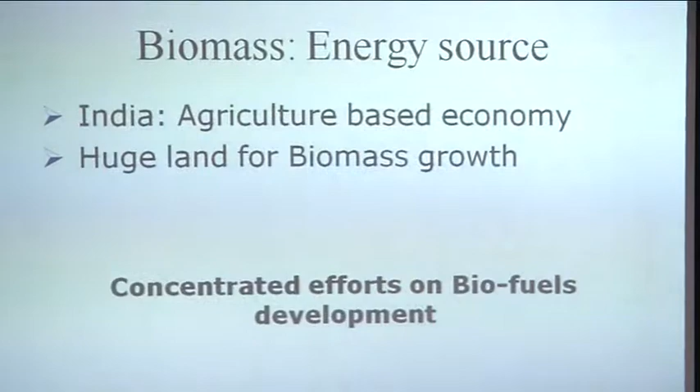What was the motivation of doing something like this? The motivation is: India, being a largely agriculture-based economy, has a huge quantum of biomass. I'll give you some statistics to start, just to justify, as all engineers do, choosing a particular topic for research, since people are likely to ask why you have chosen that topic. Either the topic interests you, or finding solutions based on it is likely to have such huge impact that it makes you famous.

Whenever you try to do something, you try to get recognition, either in terms of money you earn or publicity. Both are extremely satisfying results, and we carry out this research not only to satisfy our inner curiosity, but also to see whether we make a reasonable amount of money while coming out with a product useful to society.

As an agricultural economy, is it possible for us to look at this agricultural produce, which is essentially biomass—leaving aside food grain for now—and whether this biomass can be put to use? A lot of work has been going on, including in the mechanical engineering department, where biomass conversion to bioethanol is being practiced. The simple reason is it's easier to burn liquid or gaseous fuel compared to solid fuels. But still, 70 or 80% of India's population rely on burning solid fuels, so it is necessary for us to have a look at it.

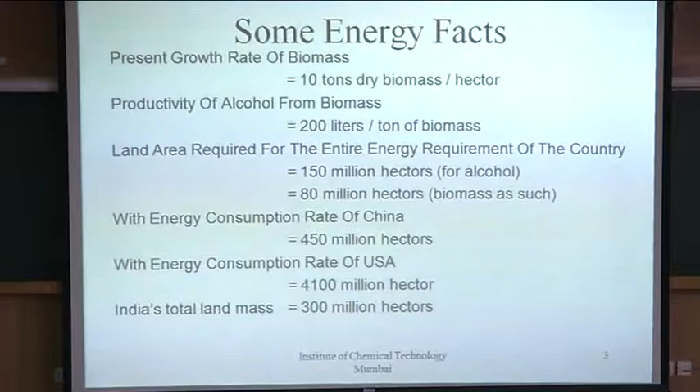If I just do some basic back of the envelope calculations, on an average, 10 tons of biomass is produced per hectare. You don't have to do anything. The typical annual rain cycle and the seeds which are there will produce that much quantity anyway. If you want to cultivate it, you can bring this particular number right up to approximately 30 tons.

Now 1 ton of biomass, in principle, all the carbon and hydrogen associated with it is converted by delignification, saccharification, converting cellulose to glucose and finally to ethanol, capable of producing about 200 liters of alcohol per ton. You can stretch it up to about 300 liters, but let us consider an average of 200 liters of alcohol per ton of biomass.

If I say that I want to satisfy the entire energy requirement of the country, you would require about 150 million hectares of land area. If I want to burn the biomass as such, because while converting biomass to ethanol we lose out on certain calorific value, you would require about 80 million hectares of land.

If you want to meet the current energy consumption of China, you would require about 450 million hectares. If you want to match the current energy consumption of the US, you would require about 4,100 million hectares, whereas India has only about 300 million hectares. So obviously we cannot be aspiring to meet this particular requirement of energy consumption and get to the level of US or China, because we just don't have the capacity in terms of land mass.

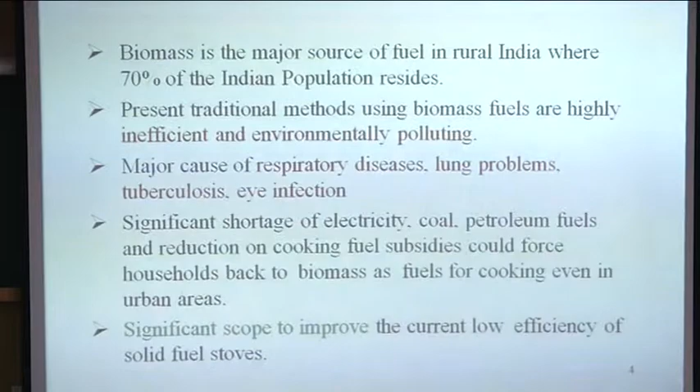Now when you want to burn the biomass as such, which 70% of India's population, the rural population, still rely on, what you realize is that these biomass stoves or biomass burning processes are run extremely inefficiently, and they are environmentally polluting.

Not necessarily in terms of carbon dioxide emissions, because this carbon dioxide is neutral carbon dioxide. The same carbon dioxide will be taken up by the plant, and the plants will grow again, and they will keep on recycling it. But in terms of emission of particulate matter, which is responsible for respiratory diseases, lung problems, eye infections, tuberculosis, and so on and so forth.

As engineers, if you keep looking at these particular processes, you realize there exists a huge scope, because the systems are run inefficiently. If the system was running efficiently, then obviously it has reached its thermodynamic equilibrium state or maximum efficiency state. But because they are run inefficiently, any process should be looked upon as an opportunity. That is the basic motivation for this work.

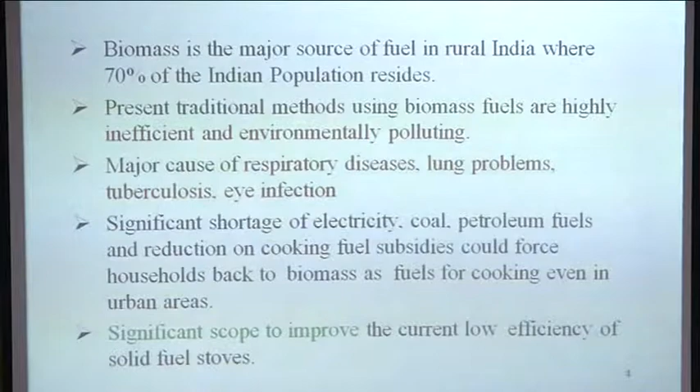In terms of liquid fuel consumption, Indians use about 2 barrels of oil equivalent per person per year. With an approximate population of 1 billion people, we use approximately 2 billion barrels per year, which is approximately 300 million tons per year, about 120 million tons, and India currently processes about 150 million tons of crude in terms of refining capacity.

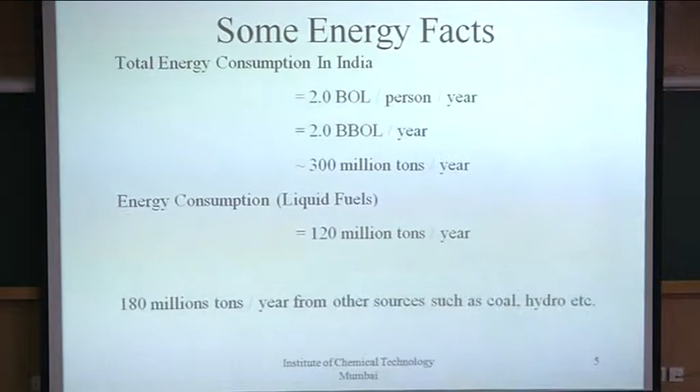180 million tons come from other sources such as coal, hydro, etc. But where does this energy go? In terms of per capita consumption, it's equivalent to 500 kgs per year, global is 1800, and US is about 8000 kgs per year. So energy consumption of India is bound to increase, as well as China, and we must be gearing for it.

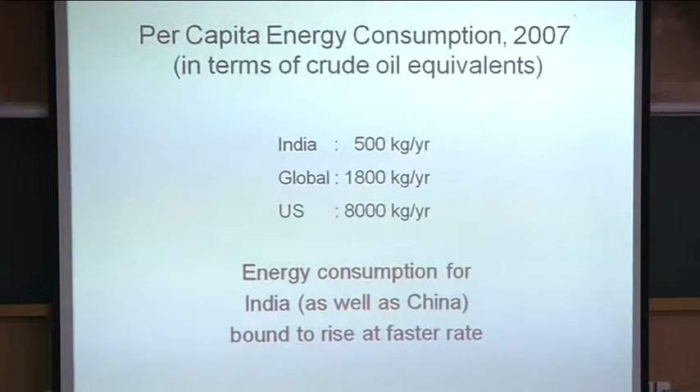And where does this energy get utilized for residents? Lighting is a fraction of it. India has a huge population. We have to prepare food for these 1 billion people, 2 square meals a day are required. And you know how elaborate these Indian cooking practices are. They are all essentially multi-step synthesis processes, and you all know that as the number of steps in the process increases, that affects conversion.

Even if you consider that, let's say, I am preparing one particular item which requires 7 steps, and I am converting each step with 90% efficiency, 0.9 raised to the power 7, ultimately the efficiencies are going to be substantially lower. So if there exists an opportunity, can we have this 7-step process converted into a 1-step process? Of course there are, and that is where you see these ready-made food packets. People are exploiting this. You have everything out there, put it in the oven or a microwave, and you have a ready meal available. The energy consumption is going to be substantially lower for you. But while preparing that, have they looked at the fundamental and basic principles which are involved in cooking?

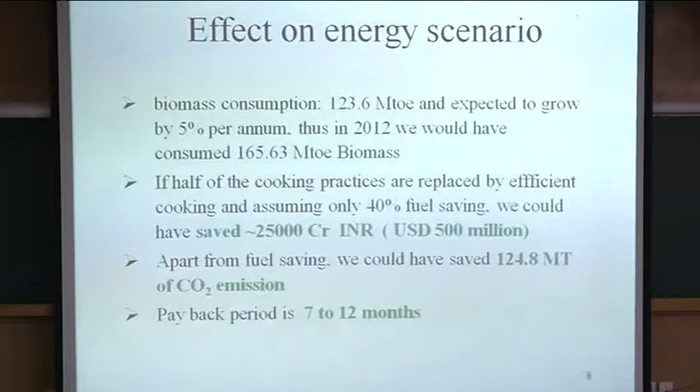If one can look at it, you can imagine the kind of impact it is likely to have. And that is why I have said that the payback period for any of these activities is usually less than a year, and of course we are contributing to the reduction in CO2 emissions. So cooking fuels in India, as we use it, 70% of the rural areas essentially rely, 85% of those rely on biomass, 15% are only commercial fuels, such as kerosene, LPG, coal, or whatever. 56% of the urban population uses LPG. LPG consumption has also increased. With the government removing subsidies, it's likely to have a huge impact.

So the outline of today's talk is going to be: a basic introduction, which I have already given. I'll run through a couple of slides very quickly just to recap what we have talked about. What is the motivation and objective? We need to look at the fundamentals of it and see how solid biomass essentially combusts, essentially burns, what sort of emissions are coming out of this, how we can model the system and have some sort of quick calculating method based on a graphical user interface approach, the integrated equations which we'll see in due course of time, and then we need to validate this with the help of experimental analysis, and we'll try to draw some conclusions.

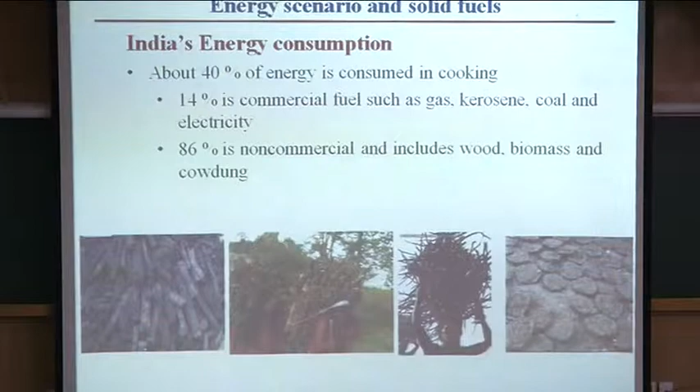Now this is the total energy consumption which we saw. About 40% is consumed in cooking, 14% is commercial fuels such as gas, kerosene, coal and electricity, 86% is non-commercial and includes wood, biomass, cow dung, and so on and so forth, as you see in this particular picture. Now this is how they are conventionally burned.

You have a 3-stone fire, which was the original device, and even when you go camping, this is exactly what you do: get 3 stones, start burning the biomass, put your vessel on top and try to cook a meal. Then people thought about improving thermal efficiency, so they came out with mud pots, like Abhinav, Alok, Pavan, which has got a chimney associated with it, creating suction required to supply combustion air.

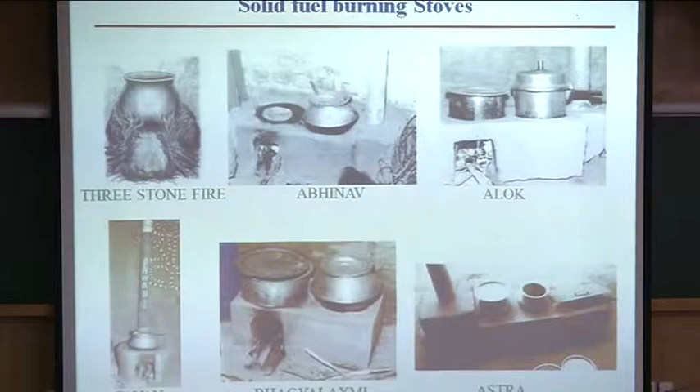Bhagyalaxmi, Astra, all of these - there are approximately 43 different cooking stoves reported by MNRE, the Ministry of New and Renewable Energy, and none of them have been scientifically analyzed from first principles. You can imagine the state of science related to one of the most important devices used in cooking practices. Improvements include metal stoves, Janta, Navajyoti, rocket stove, Harsha stove, Purja - all of these definitely improve upon efficiency, but what are the actual levels of efficiency I'm talking about?

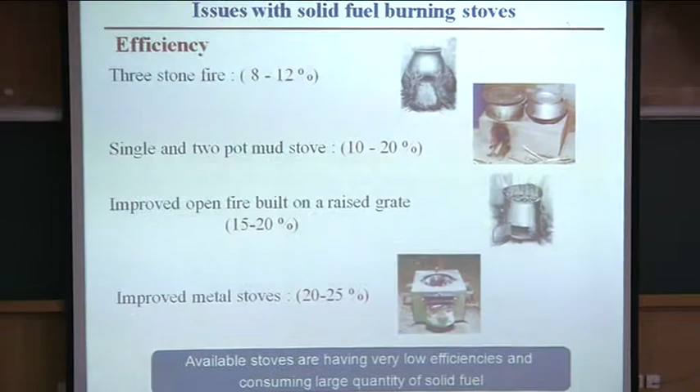3-stone fire: about 8 to 12% thermal efficiency. Single and 2-pot mud stove: 10 to 20%. Improved open fire built on a raised grate: 15 to 20%. Improved metal stoves: about 20 to 25%. The bullets in blue out there essentially tell you the basic conclusions of each of the slides we are talking about.

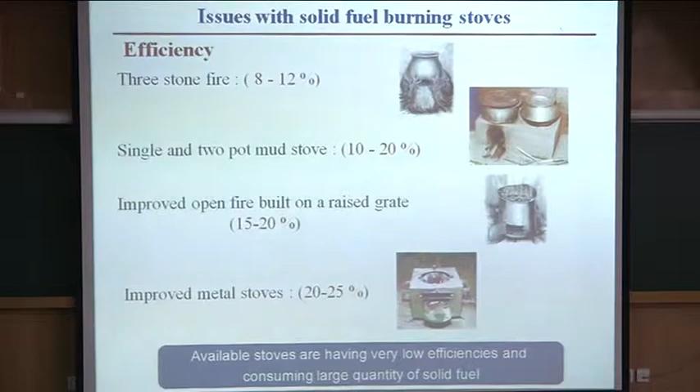This clearly indicates that the available stoves have very low thermal efficiency and consume a large quantity of solid fuel. So we need to address this particular issue. In addition to the loss of fuel in terms of calorific value, there are huge health effects associated with it, such as respiratory diseases, lung problems, tuberculosis, and eye infection.

Whenever a system is efficient, obviously the emissions will be less. So whenever we try to design an efficient system, we are naturally addressing the issue of emissions. The more efficient the system, the less it emits to the environment. So in terms of exergetic loss, or thermodynamic efficiency, we are going to be nearer to the limit.

Whenever biomass is burned, it passes through 4 stages, and we'll see how these stages occur. First it gets dried. Then the volatiles from the biomass get devolatilized, and these volatiles burn as homogeneous combustion. When all the volatiles are emitted and burned, what's left is the carbon, which is char, and this char burns in the form of heterogeneous combustion. So these are the 4 stages occurring, and depending on the design, they operate either in parallel or sequentially.

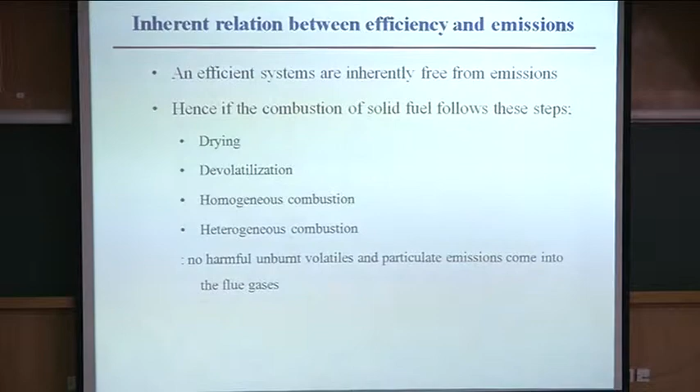And since we need to know what sort of energy is required for cooking practices, which will come a bit later, we need to be able to channel these sequential processes so that we extract the maximum out of it.

So the motivation is that the rural population does not have access to LPG - they still rely on biomass. The availability of large biomass makes wood stoves a ready-made option for rural India. But the increase of these stoves is similar to 18th and 19th century England, where they used coal as fuel to warm homes, and it produced so much smoke that they had to ban it for heating.

As a result they discovered gas or oil, and that burning became much more efficient, which clearly indicated that from that point onward, solid fuel burning has always been a problem and has caused an increase in emissions to the surroundings. So the objective is to design a solid fuel burning stove meeting the requirements of low emissions and high efficiency. This objective is achieved.

Now I am looking at the science part of it. We need to identify where all these 4 or 5 reactions, or transformations, we talked about are occurring, and whether it's possible for us to design it such that whatever particulate emissions come out, these particulate emissions are trapped, and then they go on to burn.

Obviously only the inorganics will come out, which can have micronutritional value, and can be used as a fertilizer, or as a supplement for micronutrient requirements in agriculture.

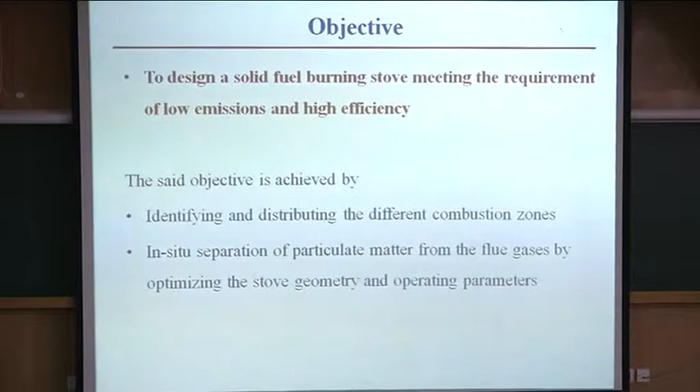So we need to understand the basic combustion kinetics of solid fuel. We need to know the typical composition, and we need to understand the basic theory of combustion.

We look at a single particle and packed bed of wood, because we don't just use one particle. We need an ensemble of particles to supply the required quantity of heat to cook a particular meal. And then we need to look at the ignition methods, whether we need to light it from the bottom or from the top.

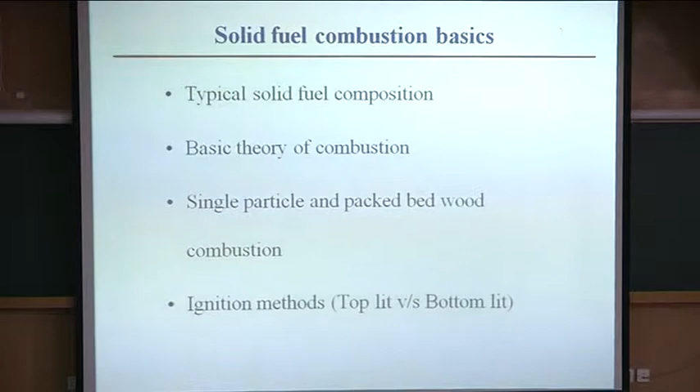All these need to be looked at, because each of these will contribute to either an increase or a decrease in efficiency. So we start with the proximate and ultimate analysis of wood, which also tells me the calorific value associated with this wood.

Now wood is available in different geometric forms, and the particular device I use will need to be able to accommodate different shapes of wood particles.

So these are the basic reactions occurring: evaporation, where water associated with the biomass gets converted into vapor. Then pyrolysis of the wood, which results in char, some volatiles, and additional tar, which are essentially hydrocarbons. Being an endothermic process, it also produces a certain quantity of carbon monoxide and carbon dioxide, which need to be burned.

Of course you can't get it out otherwise. Then you have homogeneous combustion of all the volatiles coming out, and finally the heterogeneous combustion of the char, the carbon associated with it.

So in a packed bed form, you will find that the char exists at the top, there is a flame front or ignition front somewhere in between, and unreacted fuel exists at the bottom.

So essentially when you light it from the top, the system gets dry, volatiles come out, you burn those volatiles, and the ignition front propagates downwards until it reaches the bottom, where all the volatiles are removed. Then the ignition front starts moving upwards in the form of heterogeneous combustion.

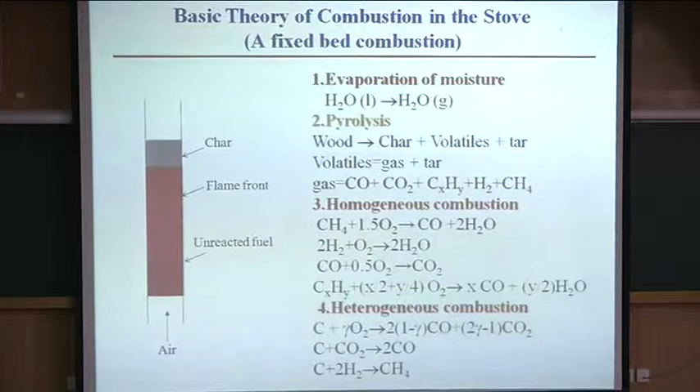And that is one of the figures. I don't think this particular thing is likely to work. If not, then I need to go back.

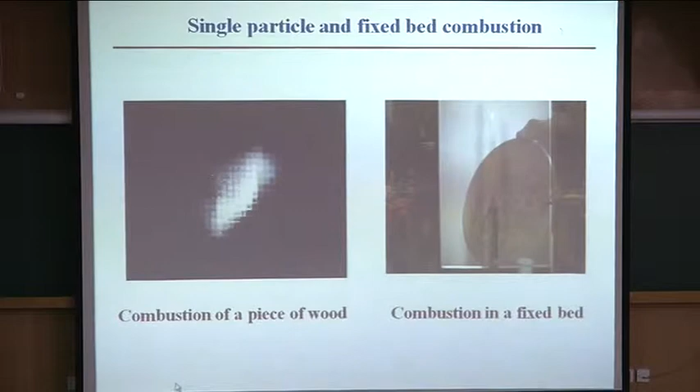Interestingly, we have been burning wood for so long, and this particular figure comes from Europe. Nobody in our country has done this.

So this is the combustion of a single wood particle. Now you can see how the wood particle is combusted. But if I supplement it with air, what happens to this as well?

You see it has started glowing again, and ultimately that carbon which remains unburned also gets completely burnt, and you're left with a very small fraction of residue, which is the inorganic material that's there. Let me show you one by one and then we can go back to it.

Okay, this is the packed bed, and what you see here answers your question. You see there is a char, a reaction front, and unreacted fuel.

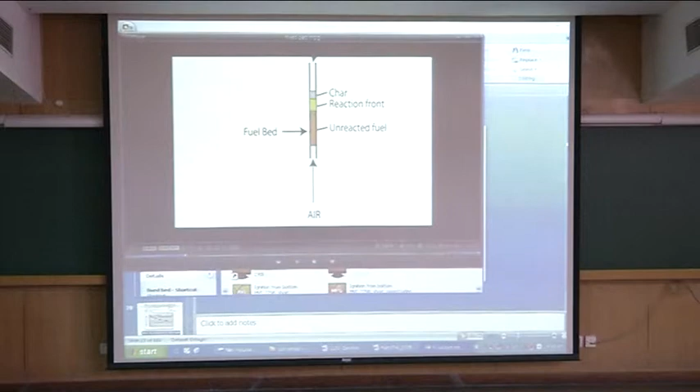So when you put it in the form of a bed, as it exists, and you light it from the top, you see how the ignition front is moving now, with char being generated at the top. When the ignition front reaches the bottom, all the volatiles have come out, and then the ignition front starts moving from bottom to top again.

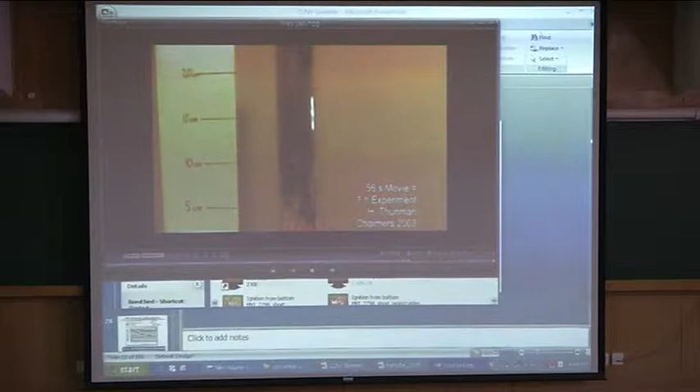This only happens when you light it at the top. However, if you light it at the bottom, the air coming out from the bottom as primary combustion air...

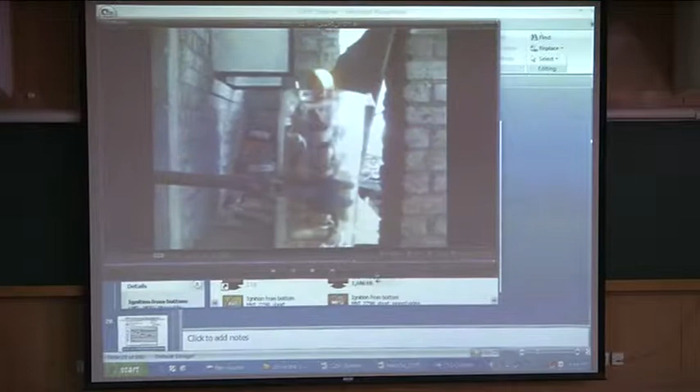That primary combustion air does not see a flame. The flame is somewhere downstairs. That heat generated by the flame is given to the wood particle on top. The wood particle on top devolatilizes, but those volatiles do not see the flame, so the volatiles don't burn, and it produces a lot of smoke.

Whereas if I burn it from the top instead, as shown in the movie I had shown earlier, you don't see any smoke, and the ignition front moves from top to bottom and then again from bottom to top.

These were the videos which I wanted to show you, which essentially tell me how this entire operation of combustion can be looked upon, and how this combustion operation can be modeled, provided the computer agrees with it.

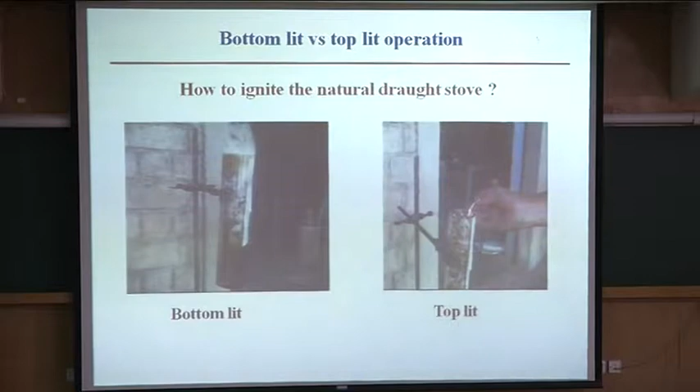Bottom lit, you see a lot of smoke on the side because the bottom part is having a flame which is supplying the heat. But how does a flame or an ignition which is somewhere propagate downward? The air is coming from bottom to top, and the only way the portion of the fuel below the ignition front can increase to ignition temperature is through radiation. So we have to consider the heat which is getting transferred by radiation and address the issue accordingly. This has all been considered in the case of the model.

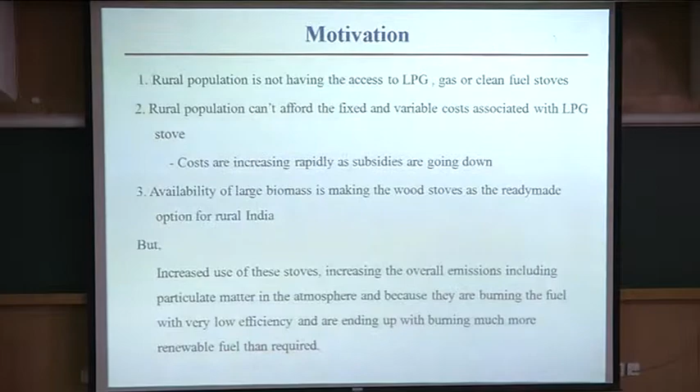Anyway, I have given you a picture. This is what it is.

So we start modeling this particular system. What do we model? We model the steady state calculations. We estimate the effective flame temperature and excess air. We write expressions and develop a model to understand how the suction of air required for combustion is actually entering the system, and the propagation of the ignition front. After the ignition front has moved to the bottom and only char is there, we need to model the heterogeneous combustion, and then all of this can be put in the form of a graphical user interface.

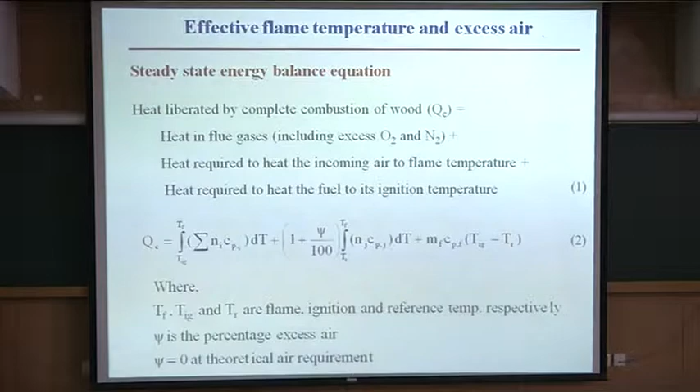So you start with a steady state energy balance, which is simply: heat liberated by complete combustion of wood is equal to heat associated with the flue gases, heat required to heat the incoming air to the flame temperature, heat required to heat the fuel to the ignition temperature, so on and so forth. So all these energy balances need to be done.

If I look at the quantum of air which is used out here, you see as the quantum of air increases, obviously the energy which is utilized to heat up that air will be used up and the flame temperature will go down. Now what sort of flame temperatures are required for cooking purposes?

If you are going to do baking, then you bake it at about 250 degrees centigrade. If you fry it, about 220 degrees centigrade. If you want to steam it, you will steam it at about 100 degrees centigrade. So the flame temperatures which you are getting are actually several times higher than what you require to cook. And as you all understand, using energy in terms of its quality for the specific application in mind is likely to be the most effective and efficient way of using energy.

How many of you know what is the exergetic efficiency of the electric geyser which you use? In terms of the first law of thermodynamics, you say this is the electrical energy which I have supplied, and the water has been increased in its temperature, mCp delta T, and you find the electrical consumption is matching that, so I am having 90% or 95% efficiency in terms of transfer of enthalpy equivalent from electricity to heating up water. But if you consider the exergetic efficiency of an electric geyser, this exergetic efficiency is of the order of 3%.

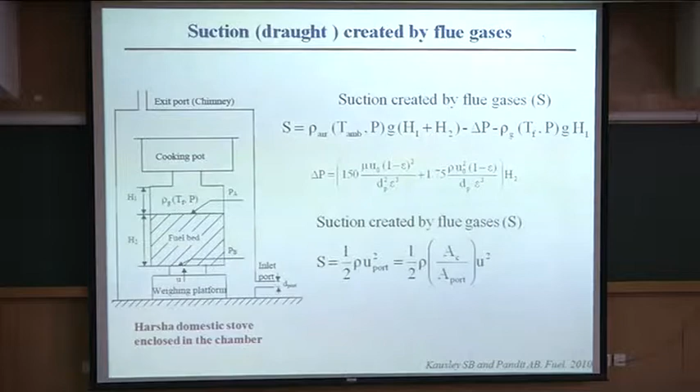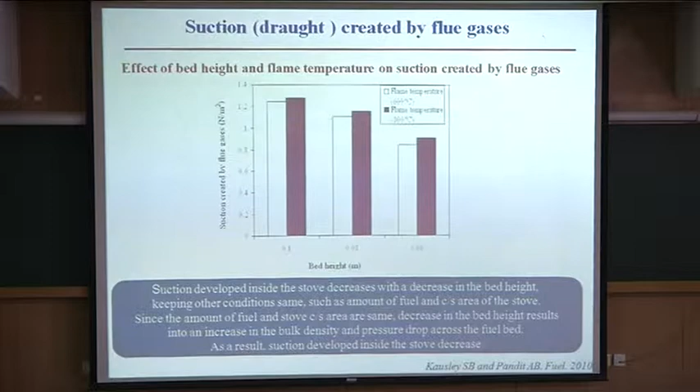If you understand the height of the bed versus the kind of suction required, because the suction should create sufficient air to carry out combustion completely, you find the taller the bed, the larger the suction created. But is it practical? If the bed is about 10 feet tall, it will create great suction, but it will be like preparing Birbal ki khichdi - I'd have a flame front 12 feet away from the vessel where I'm trying to cook the material, so losses will be substantially higher. So I need a proper balance between the two, achieved by understanding the basic heat transfer when fuel is combusted and releasing its heat.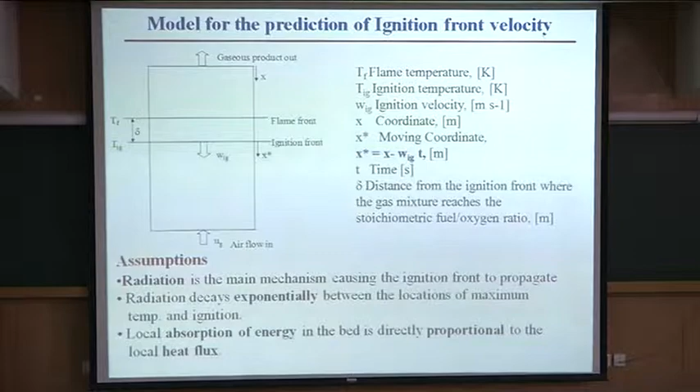So local absorption of energy in the bed is directly proportional to the heat flux. Heat flux is the calorific value multiplied by the cross-sectional area and the ignition front rate, and this allows you to estimate the energy delivery rate. So ignition front velocity can be estimated by writing a similar balance, which can be used to determine the burn rate and power delivery.

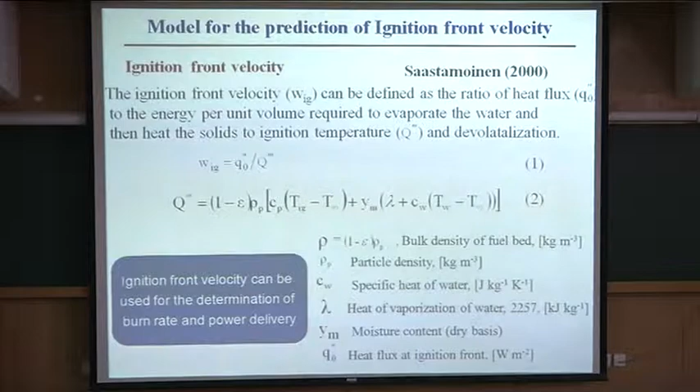If I know the ignition front velocity, which depends on factors such as shape of the wood or biomass particles and the moisture content, all this can be modeled quite easily and will allow you to calculate the flame propagation velocity. Flame propagation velocity multiplied by cross-sectional area gives the heat flux, and depending on how fast I want to cook the material, I must have a bed cross-section capable of burning at a specific rate - so many kgs or grams per minute - delivering the required power.

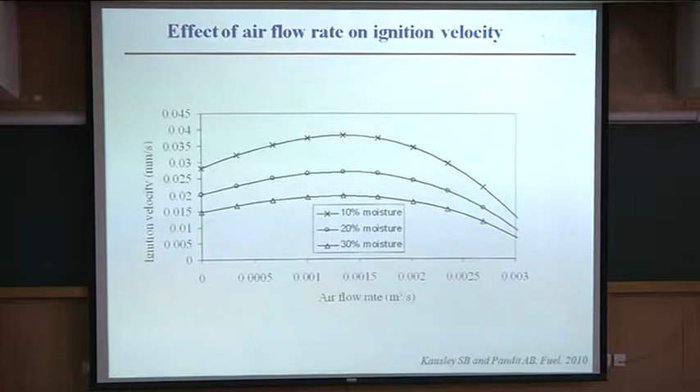So when I start with fuel of known moisture content, I will be able to estimate the rate at which the flame will propagate in the downward direction. All of this is present in the form of a simple stove.

Now what is a stove? You have a chamber in which the fuel is packed. You have secondary air supplied from the annulus, not the bottom - primary air is supplied from the bottom. This heats up the secondary air, and when secondary air comes out, it provides hot air for the volatiles to combust at the top, increasing the thermal efficiency of the system.

Secondary air is required to burn the volatiles at the top, whereas primary air is required to sustain the combustion ignition front as well as liberate energy for the ignition front to propagate. So with primary air, you model the system as a packed bed system, and write down all the balances.

We make certain assumptions in our model. The system is one-dimensional, gas is described as an ideal gas, fuel particles are of the same size. You can accommodate any fuel particle shape, spherical, cubes, stakes, or whatever - the model can take care of that. Bed voidage is assumed constant and remains so.

This may not be true, as you saw from the first movie, where initially when air was not there, it was capable of maintaining the original shape of the wood particle. But the moment air was there, the wood particle disintegrated. This results in a decrease in voidage, which increases the pressure drop, and progressively the rate at which air is available goes down.

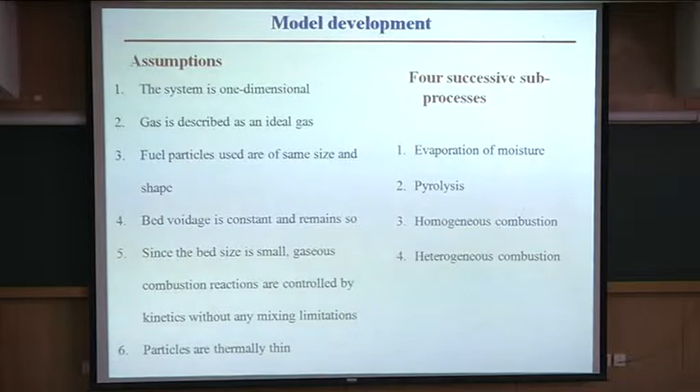So the four successive sub-processes are modeled: evaporation of moisture, pyrolysis, homogeneous combustion, and heterogeneous combustion.

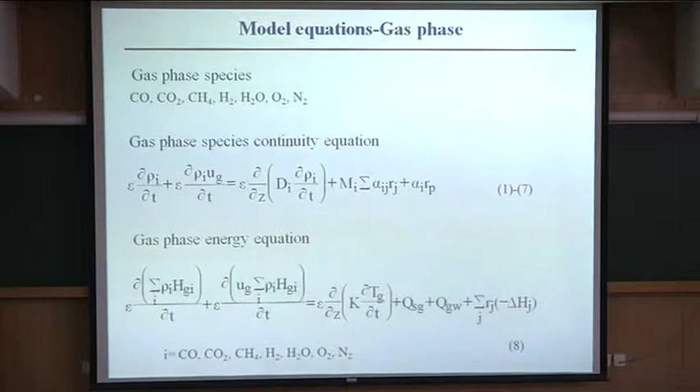We start with the gas phase analysis - gas phase continuity equation, gas phase energy equation, and similarly for each of the gases present. Similarly we do for solid unburned wood, moisture, and char, writing similar equations in terms of continuity equation and also energy equations for the solid material.

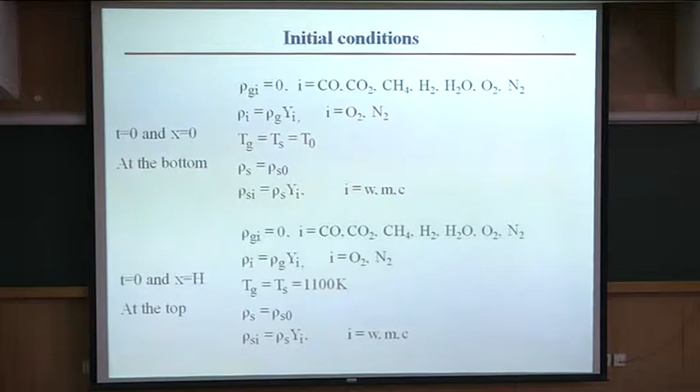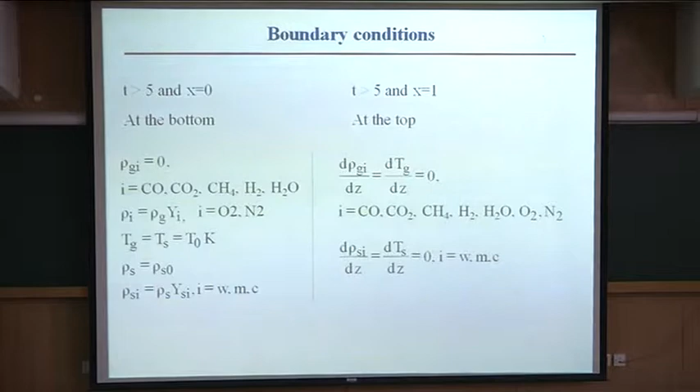We know the initial conditions because we are lighting it from the top, and the propagation of the ignition front is going to be from top to bottom and then reversing it. So I have initial conditions, and then I start the boundary conditions in terms of the densities, the starting temperatures, and the location from where I need to simulate my packed bed combustion.

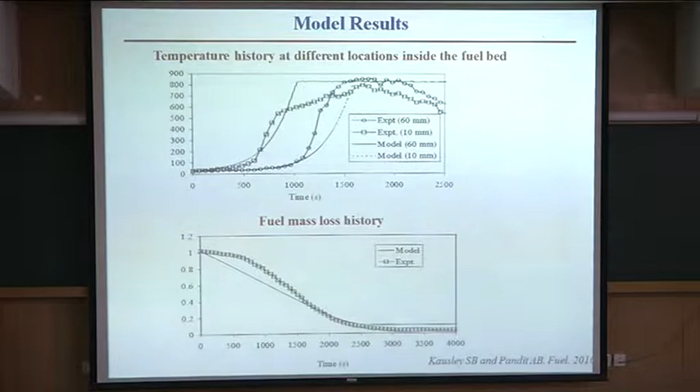Whether that energy is being utilized by the material which is getting cooked is the second issue which we will address in due course.

All of this can be put in the form of a graphical user interface, and I can essentially design my solid biomass stove based on parameters such as particle density, particle diameter, bed height, fuel amount, distance from the stove and the pot, and the length, breadth and width of the chamber, which gives the adiabatic flame temperature, the suction which is created, and the rate at which the ignition front is going to propagate. It gives you the calculation in terms of a graphical user interface based calculation that tells you the basic parameters.

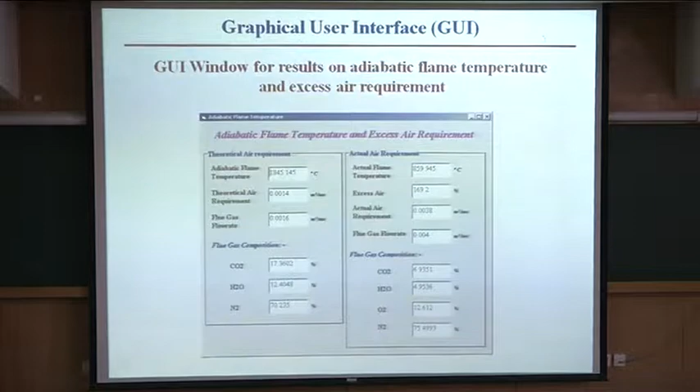So once I have this graphical user interface, very similar to ready-made software, you keep plugging in values and find out what sort of combustion rates we are likely to get from different designs, and then you need to fabricate those particulars and test it, and we'll see what happens in a minute.

So you see here the flame propagation velocities, or ignition velocities, are of the order of about 1 to 4 millimeters per second.

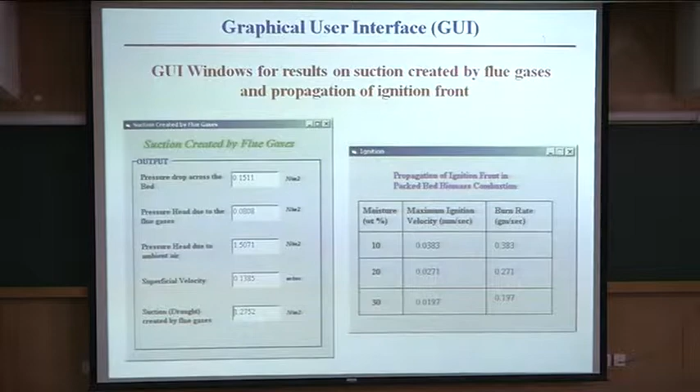That is the rate at which the flame is propagating. So if I know the height of it, I know how long my fuel is going to last, and whether that time is sufficient for me to cook the material or not, I can calculate it independently with the knowledge of the energy which is required for cooking practices.

Now we will run very quickly through the experimental analysis, where we have varied the parameters such as particle size, air flow rate, bed voidage, bed height, stove geometry, multi-pack bed, and I'll explain it to you in a minute.

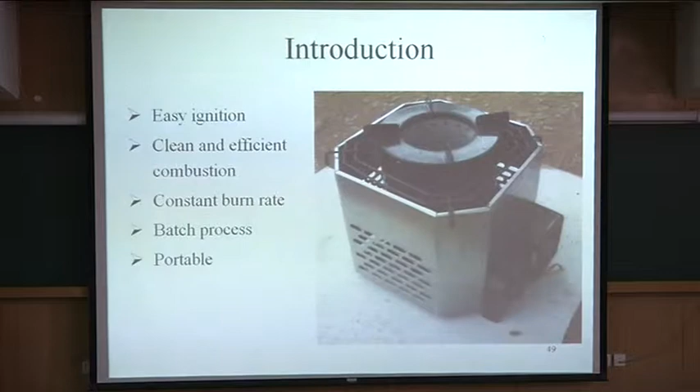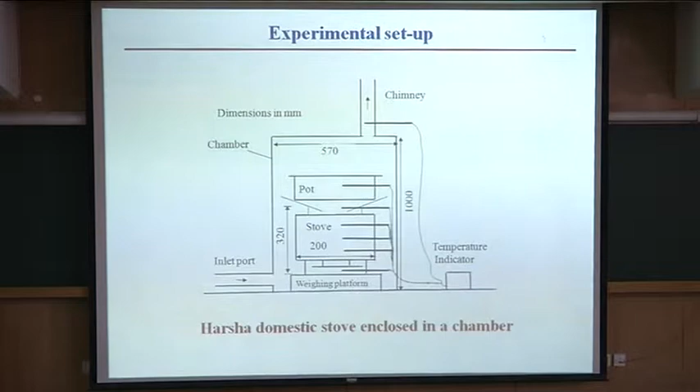So what was done: this entire assembly which contains the stove and the pot was mounted on a weighing platform, and this entire weighing platform was covered with a drum. So the only air is available through this port, and the exit was at the chimney, and this allowed me to measure the loss of weight of the fuel as a function of time based on the indicators of the weighing platform. I could also measure velocity here, velocity at the exit, using a hot wire anemometer, and I can collect the sample and analyze its gas content to validate my experimental model.

This is typically wood particles, the type of experimental device which we use. Ignition at the top of the fuel bed - this is how it starts burning. This entire thing is put in the form of a drum, and this is mounted on a weighing balance as indicated earlier. And I get information related to how the change in fuel size, fuel particle size, and what sort of temperatures with the help of thermocouples I am able to get.

So I am using mango wood particles with a moisture content of 12%, and the dimensions are a cube 15 millimeters by 15 millimeters. The only reason I have used that is since we have a model which takes into account the specific shape, I just wanted to validate the model. But the model can take care of any shape if you want.

What it clearly indicates is that initially it's very slow, then it peaks up, then it starts going down. Usually this is not the observation you'd expect when you start cooking food using gas - the moment you start the gas, it rises up, remains for a specified period, and then goes down. And the temperature of the gas flame, as we use in the LPG flame, is of the order of 1200 degrees centigrade. Whereas if you remember earlier, the maximum temperatures we were able to get was about 850 to 900 degrees centigrade.

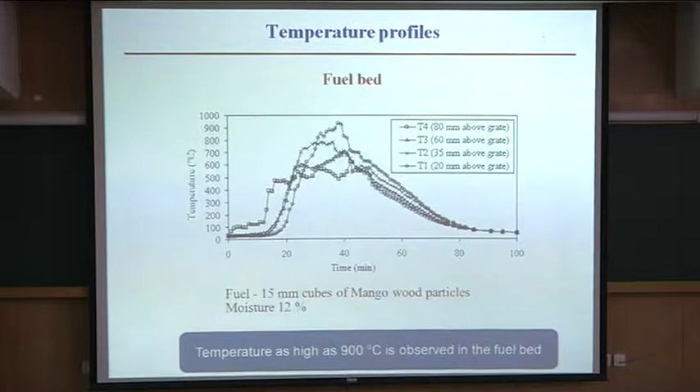Any boiler designer will design a boiler with a specific heat flux. The optimum heat flux at which the boiler will give you maximum thermal efficiency, in the range of about 88 to 90%, is when the heat flux is of the order of 20 to 24,000 kilocalories per hour per meter square.

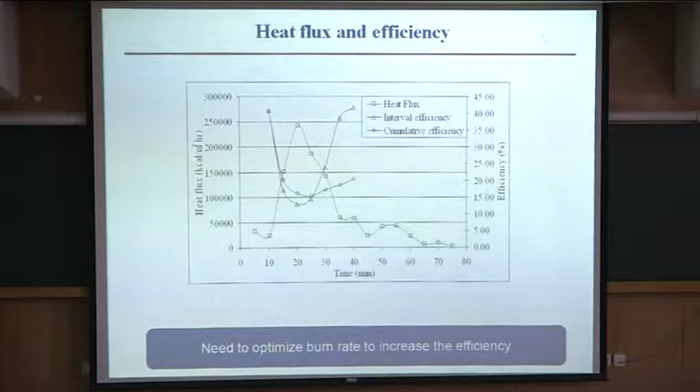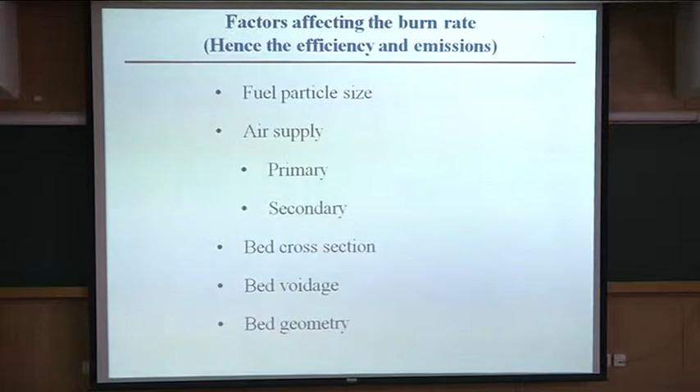If you exceed that, the boiler is incapable of accepting that much quantity of heat. More heat goes out through the flue gases, resulting in loss of thermal efficiency. So the parameters tested include fuel particle size, air supply (primary and secondary), bed cross section, bed voidage, and bed geometry.

Particles with high surface area burn too fast, which reduces efficiency. Too large particles mean combustion cannot be sustained because they have very high thermal inertia. For the particle to catch fire and reach ignition temperature takes a lot of heat—it cannot sustain itself, requiring frequent relighting.

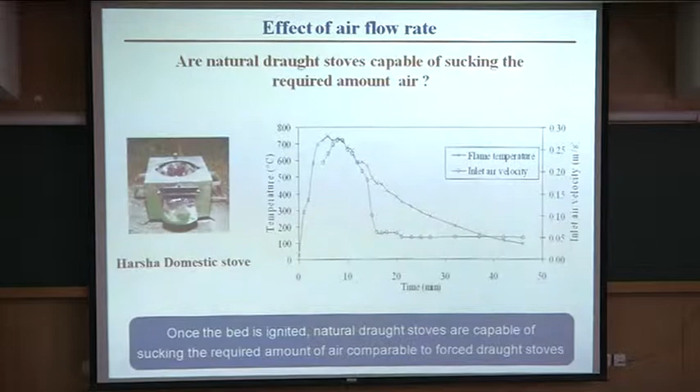Different shapes and different ways of introducing primary and secondary air have been tested. Once the bed is ignited, natural draft stoves are capable of sucking in required amounts of air comparable to forced draft. So initially, we need forced draft only until the bed catches fire the way I'm expecting it to.

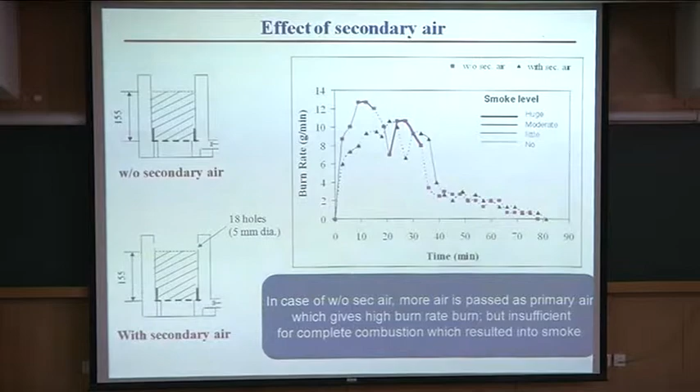With the right flame temperatures, I can accommodate the entire quantity of wood in different forms—I'll explain that in a minute. Just keep looking at the efficiencies we're talking about; we're still hovering around 16 to 22-23%.

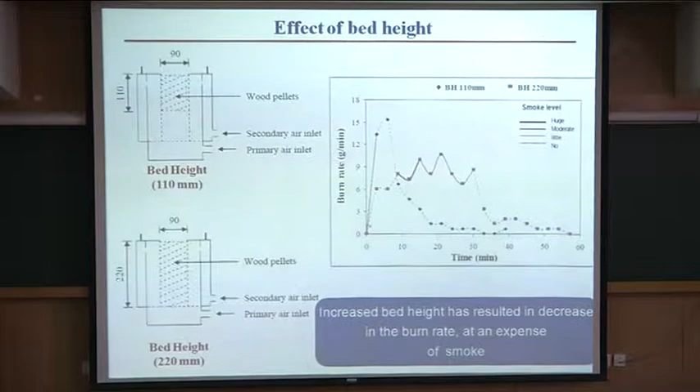So the only way to improve this efficiency is to control the energy delivery rate and manage heat flux to be in the range of 20 to 24,000 kilocalories per hour per meter square. This also shows how the smoke level changes, all linked to particle characteristics like surface area to volume ratio.

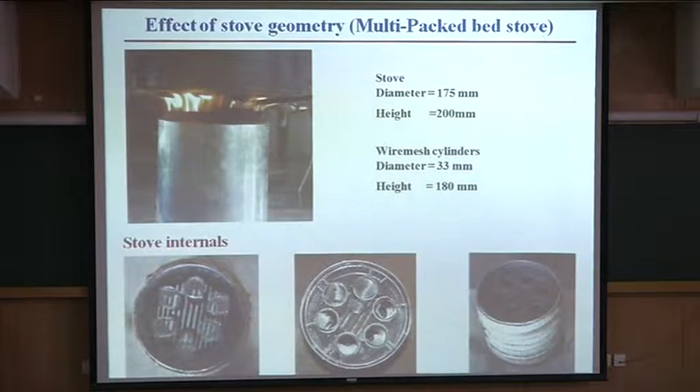So we came up with different designs. Wood could be added to these 6 chambers, which can provide the quantity of air required for cooking by filling wood in between. The next figure shows how different experiments were done—wood packed here, wood packed in between, wood at the top to light it, then observing how the rates change.

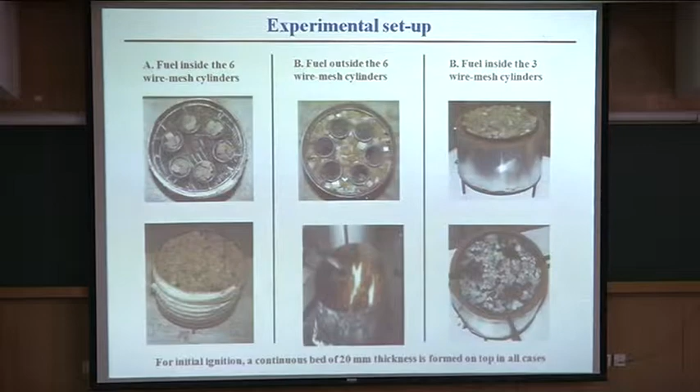This is very similar to a wick stove. The wick stove is known to have much higher thermal efficiency compared to a Primus stove. You see how effectively it is combusted, validating the assumption of no significant change in bed voidage as it burns—it remains more or less the same.

Now you see here we're able to get in excess of 30% efficiency for item C, where I pack the fuel inside 3 wire cylinders. If I use 2 smaller wire cylinders, the flame cannot sustain itself because it doesn't generate sufficient energy for the flame front to propagate.

So I need a critical thickness, which works out to be approximately 6 centimeters, 60 millimeters. You see this: initially high, then maintained for some period, giving maximum thermal efficiency. So I need control over it—a burn rate over cross-sectional area.

Initially when material is at room temperature and you want to heat it to 100 degrees centigrade, its heat pickup capability is initially very high, so you need to supply energy at a higher rate it can accept. However, as temperature approaches 90 degrees centigrade, delta T has gone down, and if I keep supplying heat, it's incapable of taking it in. So what type of geometry can I think of?

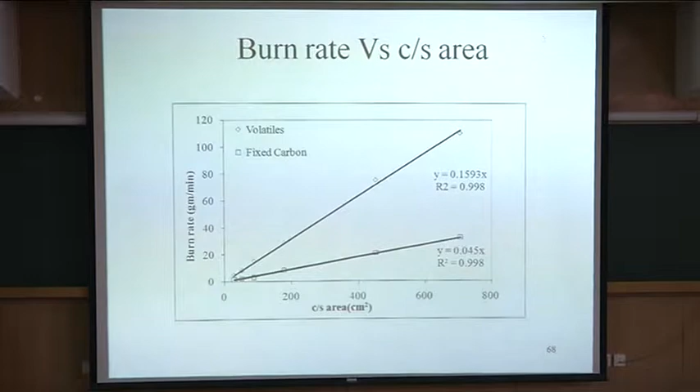Can I think of a geometry that is conical in nature? Because the ignition front velocity is the same, and as the cross-sectional area changes, I keep reducing the cross-sectional area, delivering lower and lower energy. As delta T decreases, I'll have significantly higher efficiencies. Indeed, such devices are capable of giving efficiencies in excess of 60-65% thermal efficiency for these wood stoves.

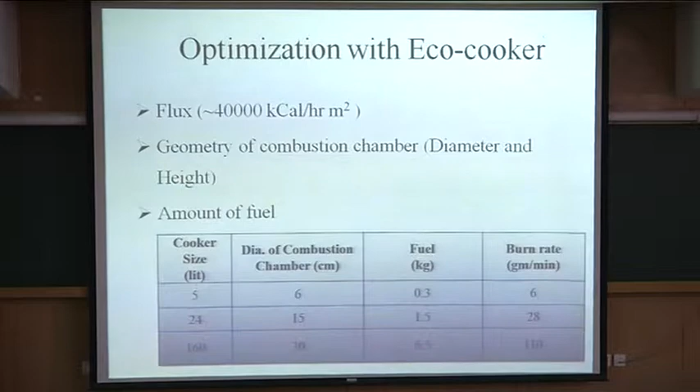We have now designed a stove, assuming we are on the right track. What do we do with these stoves? The stove has to have a cooker associated with it. The cooker is capable of taking up different quantities of material - the diameter of the combustion chamber can accommodate different quantities of wood, and you can match this to get a particular burn rate. Ultimately, I don't want to spend a whole day cooking my meal. I have certain restrictions in terms of time available, and that time essentially is 1 hour. So I need to finish my cooking method in 1 hour. So all these sub-processes have just been a review.

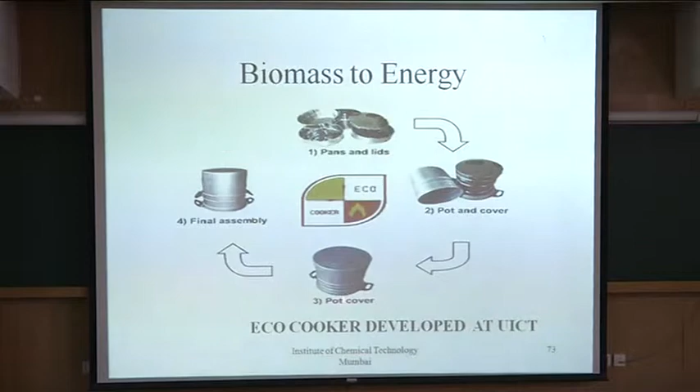So we move to an eco cooker. We came up with a device to go with our biomass stove, which can also be used with a simple gas burner - this device is indicated out here. I have pots and pans, and a bottom cover. The pots and pans are put similar to a pressure cooker, but it doesn't develop any pressure. This is the final assembly, which can be put either on the biomass stove or a gas stove, depending on what you have. This is a larger scale version, capable of cooking about 120 liters of cooked food, feeding about 300 students from a mess, and the cooked food is very good - slow cooking is probably the best way to bring out the flavors.

At the same time, cooking efficiency was not the only criteria - we also wanted to check whether the food cooked this way maintains its nutritional values, its texture, its taste. Fortunately we also have a foods department in ICT, so we roped them in as a testing panel and asked them to look at the nutritional value, the vitamin content. We compared food cooked this way, food cooked in microwave, food cooked in pressure cooker, and food cooked in open vessels. We came out with approximately 17 publications from this work based on the kinetics of loss of nutrients or enhancement in taste.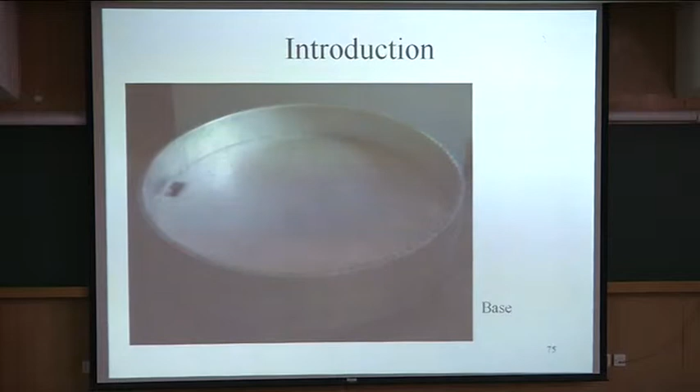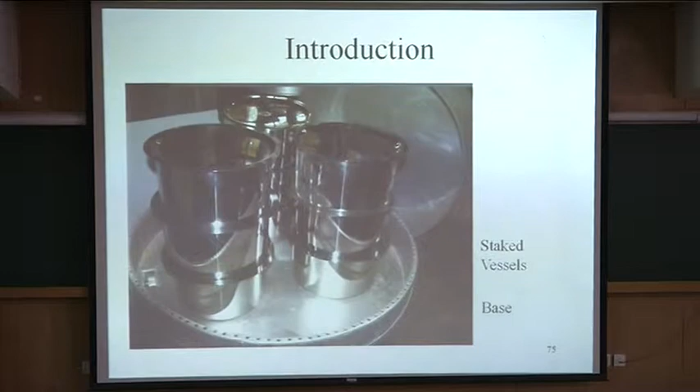This tells me the assembly. I have this bottle where I take water - this is water you can use for bathing once the cooking part is over, because you can drain that water and the hot water is still available to you. About 10 or 15 liters of water is available, sufficient for one person to take a bath. Then I put all this assembly in it. You see these holes out here? These holes provide the passage for the flue gases as they come out, and you extract heat from these flue gases as well, increasing the thermal efficiency of this device. Then you put a primary cover, and a secondary cover on top of that, and what you see at the bottom is essentially a burner which gets lit.

We could get 65 to 74% thermal efficiency as against the 20-25% we were talking about earlier. That means we are saving nearly 70% of the fuel - 3 times less fuel consumption. Working principle: I match the optimum heat flux, which is about 20 to 22,000 kilocalories per hour per meter square. I reduce heat loss by having a double wall, and the thickness or gap between the double walls was arrived at by doing numerical simulations to find the minimum thickness at which circulatory currents would be completely stopped - we arrived at that through numerical calculations and CFD analysis.

It is not necessary to keep on heating the material early shut-off is possible. The sensible heat retained in water is sufficient to cook most of the mass, because the reactions of cooking as such don't take any additional energy. Once temperature reaches 100 degrees centigrade, or whatever temperature - rice starts cooking above 76 degrees centigrade, dal starts cooking above 92 degrees centigrade - once you're able to get that temperature and maintain it for a specified period, you get the material perfectly cooked. I'll ask a question later on.

And then, because you are mounting one vessel on top of another, you are using the classical chemical engineering principle of multiple effect evaporation. The material getting heated from the bottom produces steam, which heats up the material at the top. Those who have been to Puri will understand and see how the prasadam is served - there are about 21 vessels mounted one on top of another, with a single fire at the bottom.

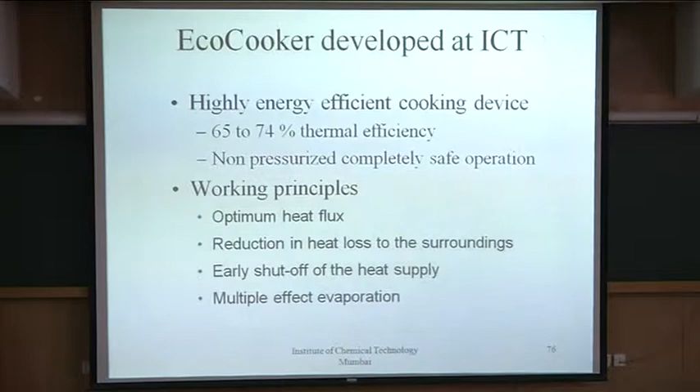What happens is, the bottom vessel is taken out after it gets cooked, and a new vessel is put on top. By the time this top vessel reaches, it takes about 12 hours, and in that time it is perfectly cooked. But with steam economy, it is going to be of the order of 10.

1 kg of steam is capable of evaporating 10 kgs of water because of this multiple effect evaporation system. This cooking device was jointly developed, available in different sizes from 3.5 liters to 160 liters, with thermal efficiency in the range of 60 to 70%, as I've already explained.

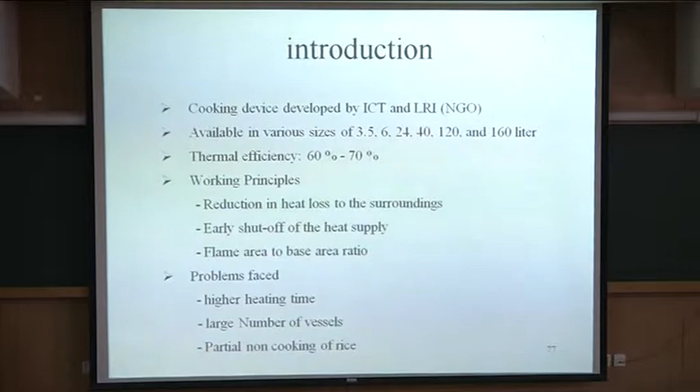But what happens is, the material essentially is not agitated. If the material is not agitated, you don't know how it is going to cook. The problem occurs when the material starts swelling, and you get stratification: hot water remains at the top, and because of its low density, it cannot be circulated. So I need to design a system capable of accommodating the circulation or convective currents associated with it.

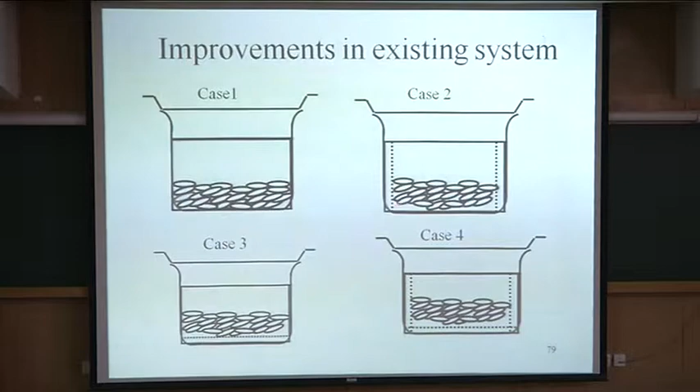I have 4 different design vessels where I provide the passage for convective currents from the bottom and from the side, and this results in substantial saving in energy again—approximately an additional 10% improvement in thermal efficiency can be obtained.

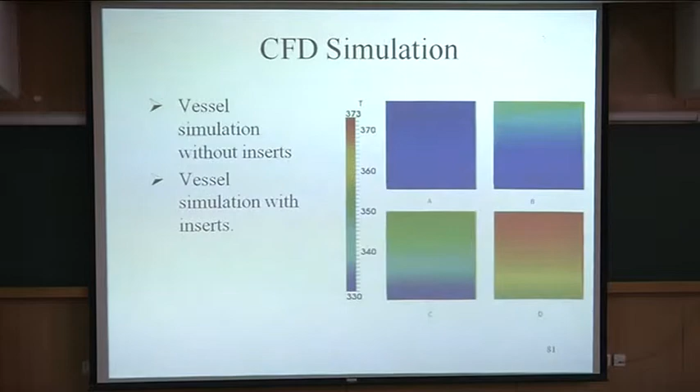So we did a numerical simulation of that. We took a quarter of this particular vessel and addressed how the stratification is occurring, how the layers can be circulated to supply the necessary heat required for cooking purposes. This resulted in an additional 15% increase in thermal efficiency.

So I'm talking about this, and I think only a couple of slides are left. We are talking about a possible saving of the order of 12,000 crores.

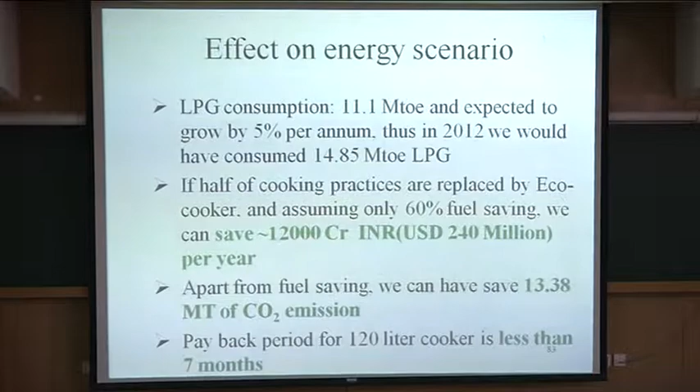We also analyzed the kinetics of cooking—a very simple device. We developed a model very similar to essentially a shrinking core type of model. That model was validated, and we calculated the activation energies. All this is published. We need to have a degree of cooking, and it can be assessed in terms of degree of gelatinization.

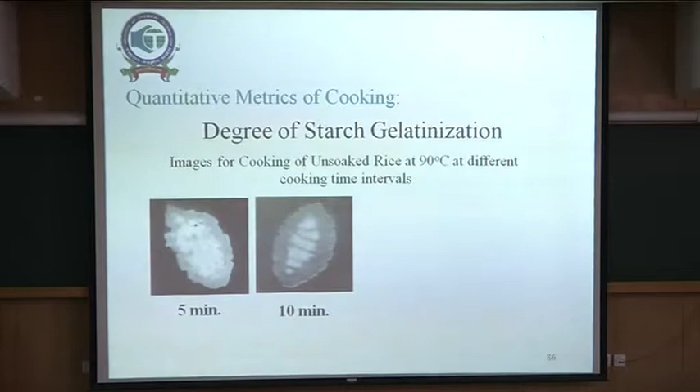This is rice cooked for 5 minutes, rice cooked for 10 minutes, rice cooked for 20 minutes, rice cooked for 40 minutes at a specific temperature. What you see here, the transparent part is where the starch is completely gelatinized, and the semi-translucent or opaque part is the core of the rice which is not getting cooked.

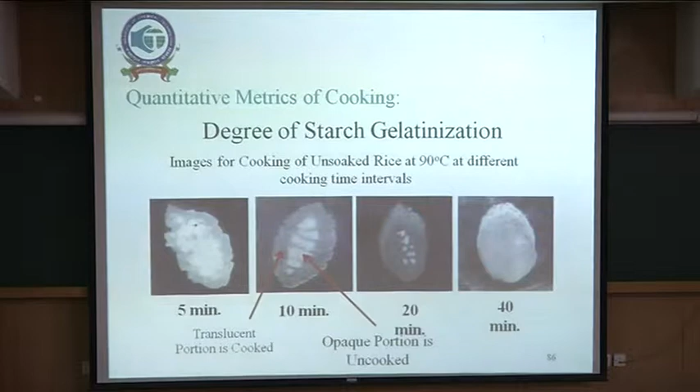So it validates my assumption of a shrinking core in terms of uncooked mass, and I can get all the information necessary in terms of the rate at which cooking can be done. Now I can fit this using simple first order kinetics or whatever kinetics I feel, and estimate the values of the rate constant for these cooking processes.

Now this is still a batch cooker, capable of feeding 150 to 160 liters, and capable of feeding about 300 to 500 people. But there are midday meal schemes of the Government of India which are feeding 20,000, 50,000. How do you handle that?

That was done by developing a continuous cooker. Currently we have a model cooking 300 kgs per hour of cooked rice from 100 kgs of raw rice, capable of feeding approximately 300 people per hour. The system is very simple again—this is a pilot which we developed.

It's essentially a screw, and you use different materials with knowledge of the time required for cooking. Once you know the cooking kinetics, designing such systems for chemical engineers is no difficulty. If I have dal which takes longer time, I add dal out here, I add rice out here, I add vegetables out here, because each of these at a specific temperature requires different lengths of time.

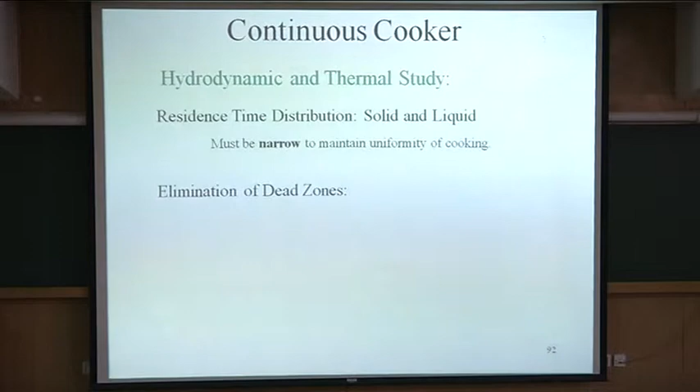I need to modify the subsequent flights so that all that material is mixed up and I get a perfect khichdi. If I want to cook rice, I can have only rice. So the capacity of the cooker depends on what material you are trying to cook. We also studied the residence time distribution of solid and liquid. What we want is uniformity of cooking, avoiding dead zones, and good heat transfer from jacket to fluid.

We now need low shear, otherwise all the grains will get smashed up and I will get a paste of cooked rice rather than rice itself, and I need to look at the rice.

So these are typically two setups we tried, 5 kgs per hour and 100 kgs per hour, and we have now got a device which recycles this hot rice as it is coming out, heats up the water, takes out that heat, and then feeds that hot water back into the initial stages. So I am recovering heat, and now I can work with overall thermal efficiencies of 88%.

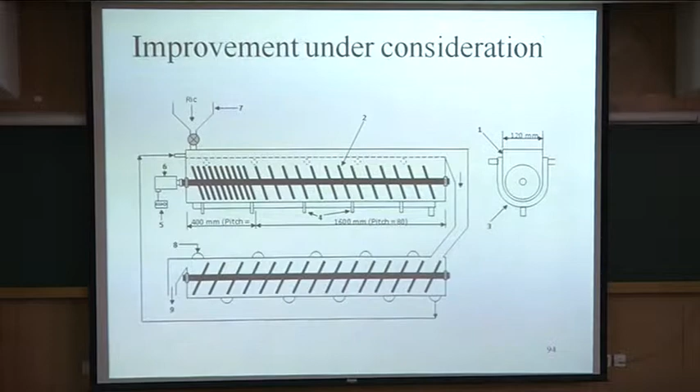That means only 12% of the energy is required otherwise. Can you imagine? Now we are talking about 40% of the energy consumption of the country being addressed, and you have the capability to reduce that consumption substantially.

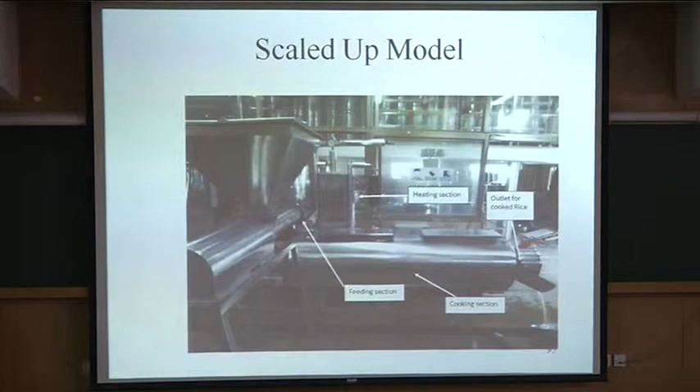This is a photograph of the final assembly of the 100 kgs per hour system. We ran this at ISKCON, where they feed about 22,000 students at a time. They start at 2 o'clock in the morning, and by 8 o'clock all their rice requirement is cooked and ready. Since the rice is coming out continuously, you just need to transfer it as the casserole gets filled, and as soon as it's filled, you transfer it to a vehicle which takes it away.

So let's see if I can show this. This is just an indication of the sort of impacts I would like to have. I would like to acknowledge all my students here, and I will leave you with the final video.

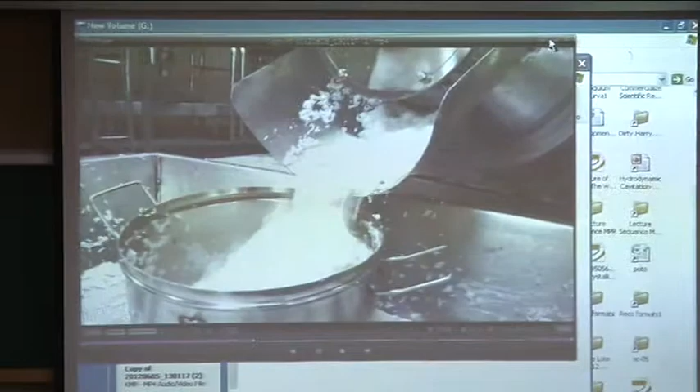This is the continuous cooker, and you see how the rice is coming out fairly free flowing, and you see the container getting filled as it comes out from the other end. Thank you very much.

Thank you. We have time for one or two questions. Either I have made it too simple, or it is still not glamorous enough.

So, can you please explain how you calculate this exergetic efficiency? Yeah, 3% for an electric heater. I knew that I would get a question on that.

The objective is to heat water for bathing purposes from, let's say, 25 degrees centigrade to at most 45 degrees centigrade. Now effectively, to get water at 45 degrees centigrade, ideally I can use any heat source capable of heating it to that temperature with a gradient of maybe 10 to 15 degrees centigrade plus. So effectively I would be using extremely low quality energy, and it is sufficient for me to do that.